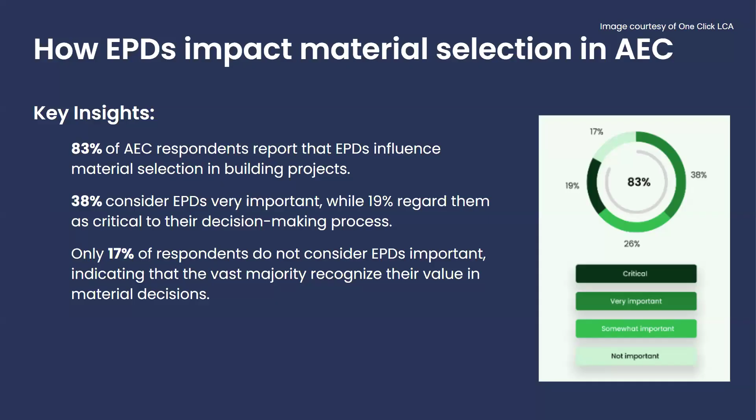And frankly, on the next slide, there's still not enough manufacturers doing this work. What I mean by that is doing the life cycle assessment work, not just to get an EPD, but to truly understand the life impacts or environmental impacts of the product, to ensure they're improving that portfolio. We've been on a journey as a company for 10 years now, leveraging and utilizing LCA as a tool for designing a better portfolio that you have at your fingertips to design your projects and ultimately create a better built environment. But what you see here is there's still a lack of manufacturers doing this work to the extent that they need to.

What I'll say about this is we saw about 10 years ago an initial movement towards EPDs, but they were also industry average. It was, how do we take the sum of all parts and put them into one comprehensive LCA that says, here's TPO, single ply membranes, here's what you can expect the environmental impact associated with that product to be across the whole sector. It's not good enough anymore. This commitment, this work by manufacturers - identify those manufacturers that take this work seriously, because honestly, those who are doing product specific EPDs have the products to back up a better built environment from an environmental performance, as well as from an overall building performance perspective.

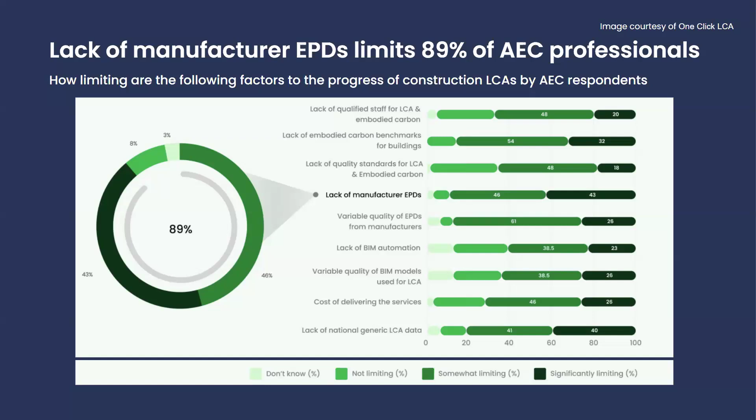And Jeff, if you want to switch into this study we've done, which is really compelling. I'll definitely do that, Jen. Thanks. I think the product specific EPD and disclosure requirement is increasingly becoming part of LEED v5, for example. So there's a push and a pull - a push by leaders and a pull by the sector - in continuing to improve the environmental performance of the built environment, as represented in LEED v5.

Moving forward, what I will say is we don't look at this just at the individual product level. One of the critical approaches we've seen to take is, because roofs aren't necessarily built just one product at a time - you guys know that as well, if not better than us - it's about building a system. How do we build a system?

So what we've done is we launched into a study about a year ago, and you can jump to the next slide if you like, Jennifer. At the time, we were working with Cove, who was doing a lot of analysis around building performance and looking at ASHRAE 2019 baselines and equivalent industry standard systems.

We looked at 6 different roof systems, 3 TPO and 3 PVC, referred to as good, better, best. We've always believed that at the core of our products, environmental performance is paramount, and that our basic portfolio products and systems need to have environmental performance second to none. That was at the heart of why we did this research, looking at how a good, better, best system—TPO and ISO, or PVC and ISO—compares to the industry average and other materials out there.

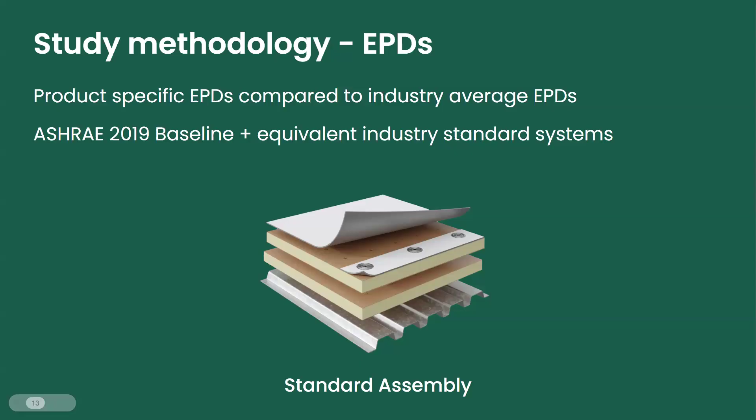So I'll share a little bit about how we did this. We looked at all the climate zones across the US, incorporating the International Energy Code, as well as doing a comparative evaluation of all the product-specific and industry average EPDs to determine how roof systems actually compare. We didn't do this work ourselves—Cove did it. We submitted all our data to them and they did the evaluation.

This gives you a picture of the climate zones we analyzed. We were looking at two things: equivalent energy performance, based on similar energy requirements for that specific zone, and embodied carbon performance. What we found is that our systems—this is our base system comparison—comparing our TPO, PVC, and polyiso insulation products to the industry average TPO, PVC, and ISO, show a significant reduction in embodied carbon.

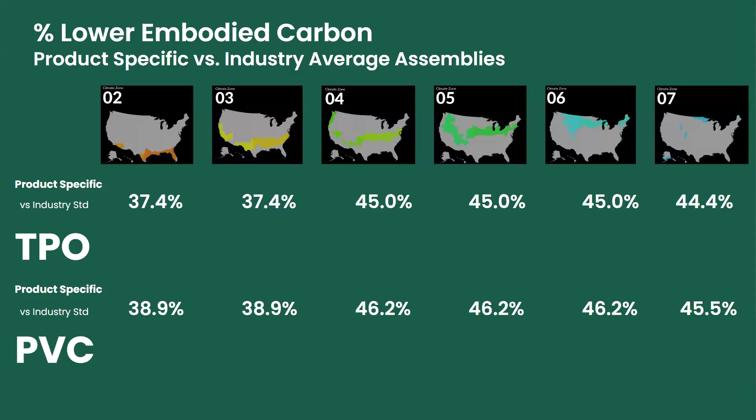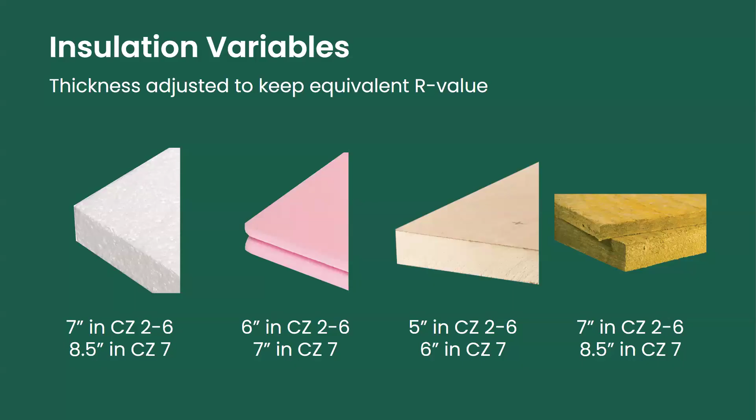So we didn't just stop there. We didn't just look at the comparative analysis of the same product to our industry average—we looked at competing materials in insulation. This gives you a snapshot of what was important here: not all thicknesses are created equal. The amount of material used, whether it's polyiso, EPS, XPS, or mineral wool, requires different thicknesses to meet the energy code specification for that climate zone. This is a snapshot of what we did there.

Again, this is our base system: a 60 mil single ply TPO mechanically attached to 2 layers of 2.5 inch polyiso insulation. We compared that again to the industry average, and then to EPS, XPS, and mineral wool. You see again an equivalent significant improvement, clicking through to the embodied carbon savings associated with that TPO polyiso system. Jen, could you click to the next slide and have those numbers pop up?

So on average, around 42% over industry average. Again, this is nationwide, not just one climate zone. This is an average, but a 16% reduction to EPS, 64% reduction of embodied carbon to XPS.

And a 77% embodied carbon reduction to mineral wool. So I'm really curious, Jeff, what roof insulation are you specifying, those of you listening in? Polyiso is about 70-75% of the insulation utilized on roofs, but there's areas where different choices are made, so I'm curious where this group lies in terms of product specification type for roof insulation. If you could put that in the chat, that'd be good to know.

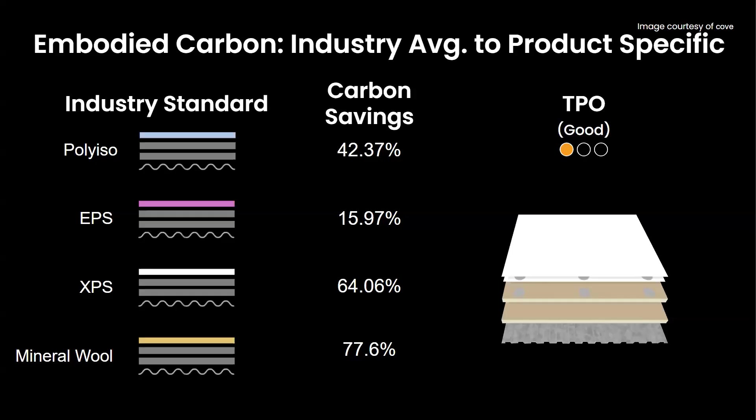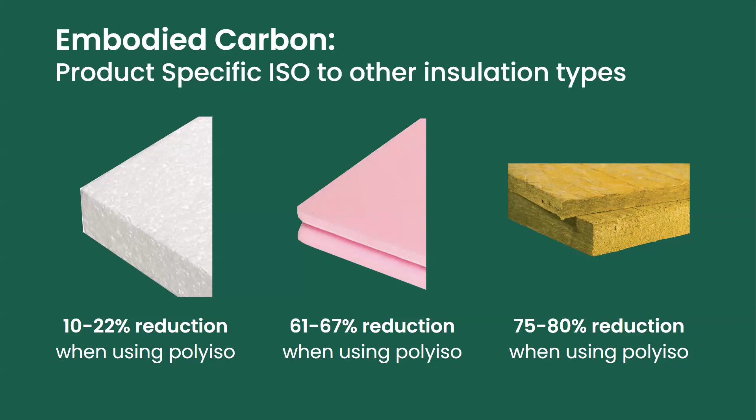And the one thing I'll add here, this is our base polyiso product. This is not even the non-halogenated polyiso product in this base assessment here. That would show even greater performance. Jump into the next one. So the product specific comparison dives in a little more deeply into those 3 other material comparisons as well.

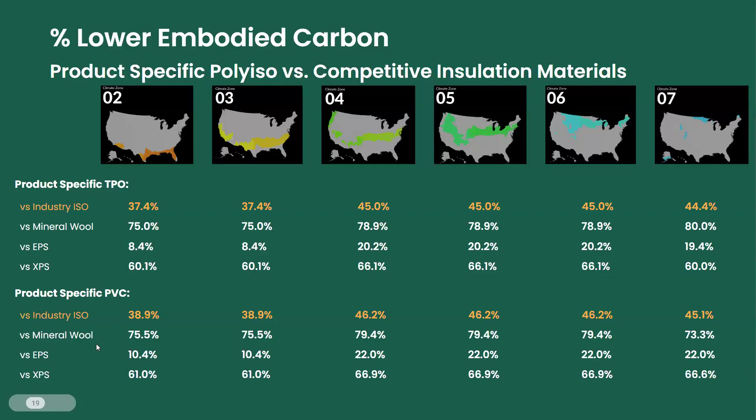And then lastly, digging in, we didn't just do this assessment on our standard assembly. We did it versus an upgraded assembly, which included a cover board here, which you see. And then we ultimately did a final comparison with our NH polyiso with a vapor barrier as well as cover board and thicker single ply membrane, all experiencing equivalent performance, if not even greater performance, as you can see here. That better system, the one I just shared that incorporated the cover board, we see a 50% reduction in or improvement in carbon, embodied carbon savings.

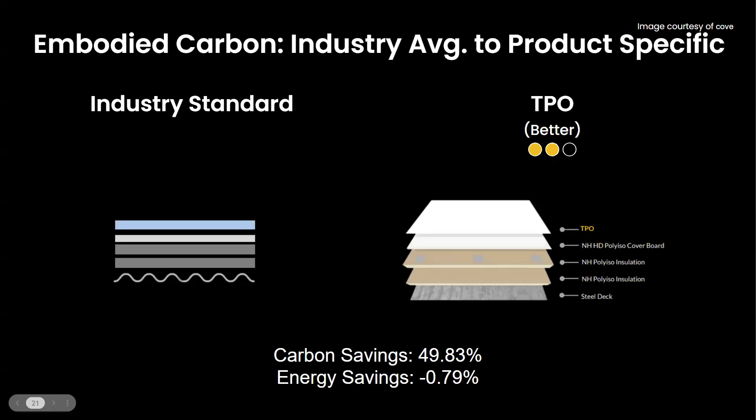So with that, there's a lot I just shared with you. There's a lot to dig in here. We're very excited about this data because it goes beyond just that product specific environmental performance, and it looks at the full roofing system performance.

And again, there's trade-offs, but this is the type of research and effort we want to do in partnership with the architectural design community to really help property owners and building owners set their goals and realize how the roof plays a role in an overall project's sustainability performance, whether it's the green building goals they've set for their projects, or green building certifications they're looking to achieve, or ultimately helping to make the case for why green, sustainable, and sustainably designed and built buildings actually perform better for them, as well as their tenants and customers.

We're here to help partner with you in making the case. We've got a lot of research. We've been doing this for years to really help the whole value chain of the built environment recognize and realize that you don't have to always make the trade-off against sustainability or sustainable design. It actually pays off for you.

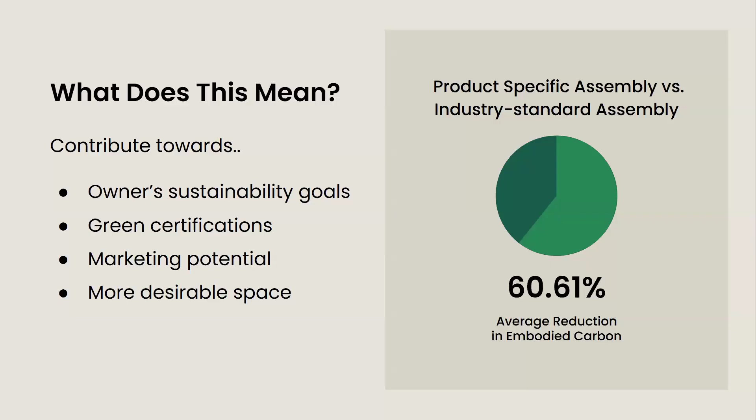So I want to focus on this Goodwill project, which is the Goodwill of the Great Plains. And this is Goodwill on multiple levels, right? It is a charitable organization. The purpose of their building is beautiful.

They were able to make sustainable choices in a budget-constricted project. So a little bit about this project: it's not your typical Goodwill where we're dropping off donations. This is actually a multi-use building.

It has an adult daycare in there, as well as some of their offices. Their requirements for this project were that it was accessible on both cognitive and physical capabilities, but it was also net zero.

Okay, so let's dig into that a little bit. We have a bunch of design choices here, and this was a project designed by CMBA architects. They wanted a robust design with a mindset towards the ease of installation. So this is the assembly they came up with.

We have a vapor retarder at the deck level. We've got two layers of polyiso insulation that are mechanically attached. We're adhering that HD polyiso cover board, and then we have a self-adhered TPO membrane.

As we talked through with the architects, what they were really looking to achieve was both the reflectivity in the TPO membrane, as well as the properties of the vapor retarder that's installed as an air barrier. This is really helping to reduce the strain of the building's HVAC systems, resulting in not only saving on energy and the cost of energy, but also equipment maintenance cost, because we're not overstressing this equipment.

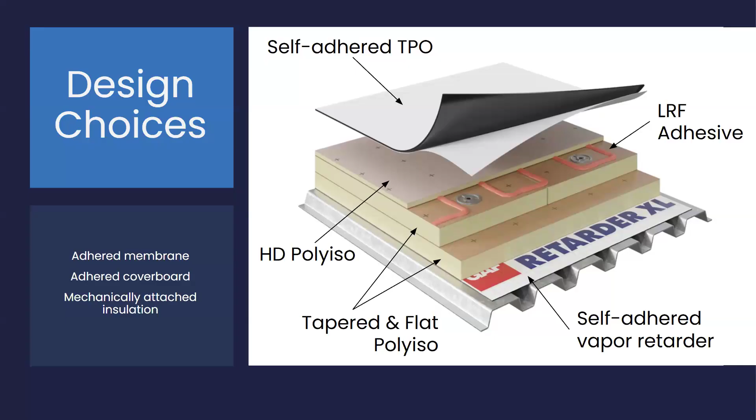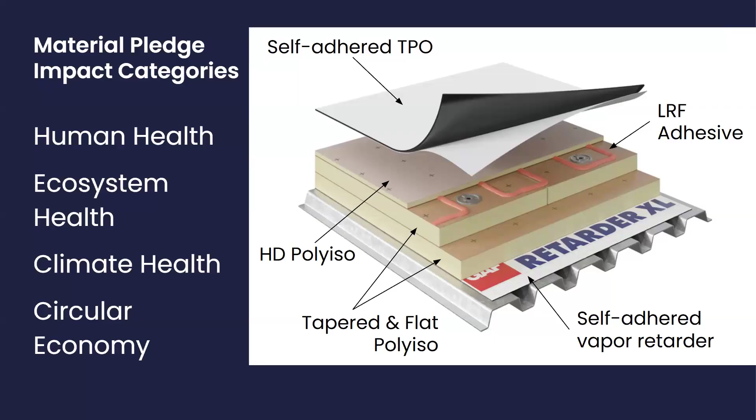So the next layer is the impact that these design decisions have on human and environmental health. We can really lean into that when we're making decisions with intention, like we did on this project. This was not a Living Building Challenge project, right? They didn't need to comply with all of these elements, but they chose to do the right thing. They chose to say, what can we do within our budget?

Now, this is not a crazy over-the-top assembly. It does have the vapor retarder, which is important for many other reasons as well. But all of these layered into having this great impact. We're thinking about recyclability, durability, minimizing chemicals of concern, and what are the trade-offs that we need to have in these conversations. So with this assembly, we look at all the environmental certifications that we can have in here.

We have third-party verified ingredients through our insulation and the roof membrane, and also third-party verified recycled content for that insulation and membrane. We have product-specific EPDs that are certified, not just produced by us, but certified for both the insulation and the membrane. And then the resiliency is really layered in there with that HD, non-halogenated polyiso cover board.

Can I add on there too? With the vapor retarder, we actually have a Green Guard Gold certification for low emissions with that vapor retarder. I think it's the only vapor retarder on the market that has that UL Green Guard Gold certification. So there's just another added element into this assembly as well.

To us, the next step in this iteration is using non-halogenated polyiso, both in the insulation and the cover board. Using that can have a significant impact on human and environmental health, as well as longer term performance. With a non-halogenated material, we're red list free, and there's no reduction in R value at low temperatures. This is available in both regular ISO and high density.

So in this scenario, this is how we could take it to the next level. And spoiler alert, there's no added cost to doing this. Jeff, you want to tell them why? I think this is the best story, and I know you were so instrumental in making this happen, so I don't want to steal your thunder.

No, there were a lot of people that were very instrumental in making this happen. But ultimately, at the core of building sustainability from the ground up, or from the roof down in your project, it takes everyone. So it was years of engagement with our suppliers to say, how can we change the material makeup of our polyiso insulation to ensure we take red list chemicals out of that. We are constantly analyzing what's coming in the global red lists and saying, how do we start designing ourselves for a future product or system that won't have any of these one day.

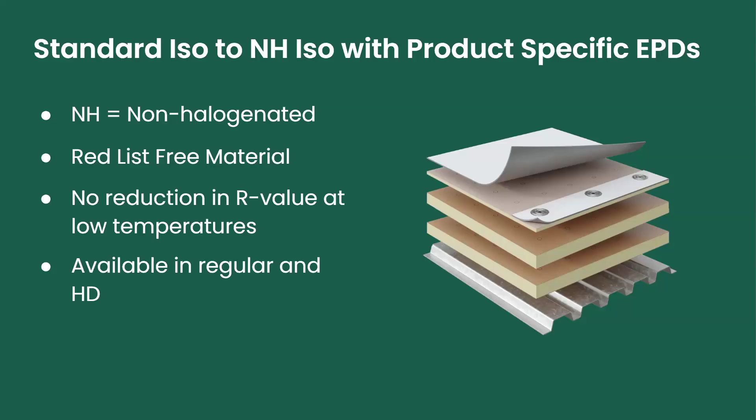So we've now removed that value engineering conversation where the contractor is going to say, we're going to take this out. That's gone. That argument is now gone. And this is a really great way you can hold this part of your design in the project because there are no additional cost implications.

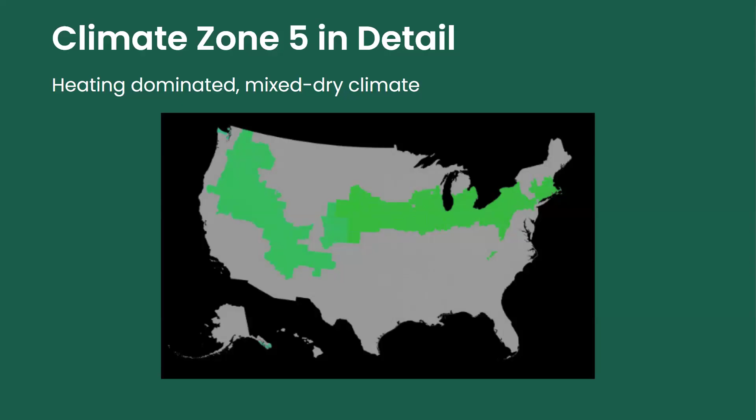So one other thing I wanted to mention about this Goodwill project: it's up in Iowa, so we're in climate zone 5. That's a moderate to colder climate, we've got full on seasons, cold winters and hot summers. So the insulation and moisture control are really key to managing energy costs and tenant comfort. This meant the project needed to be very focused on having a tightly sealed building enclosure with continuous insulation, which is why you saw that vapor retarder at the deck level—we needed that as part of the air control layer to make sure we were sealing that out and not allowing any moisture up into that assembly or into the building, to prevent condensation risk.

So let's see. This is some data we pulled together through the study that Jeff was sharing with you—this is embodied carbon reduction for a bunch of different building types: data centers, hospitals, warehouse, retail, because we're just looking at insulation here. So if I look at the embodied carbon of industry standard polyiso insulation, this is the volume of embodied carbon. What does that look like—so this dark blue is the polyiso, this medium blue color is the TPO membrane.

So this is just industry standard products. Now, if you were to specify specific products and using our product-specific EPDs, this is a pretty significant reduction.

And this reduction is what you're going to see in the polyiso. This is a 49% reduction. So we really see that the insulation has such a big part of this.

Now, from a performance standpoint, I'm always going to advocate to have a cover board, especially when we have rooftop solar. So here, if we add in the HD cover board on top, yes, it's adding R-value, but it's also adding to the greenhouse gas emissions. But that's still a 40% reduction.

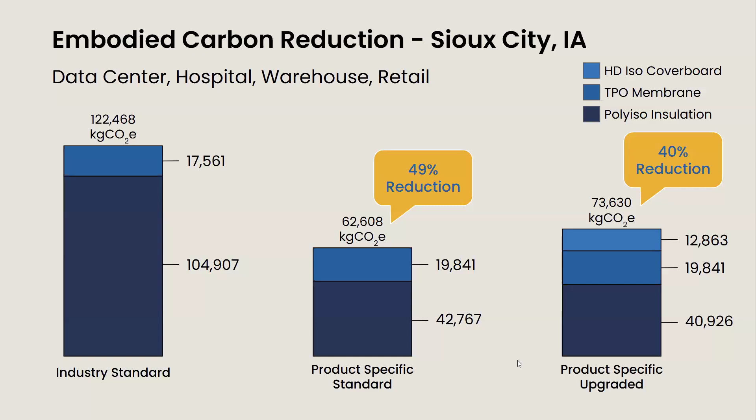This is a really considerable reduction that we can have just by being intentional on how we specify, and really encouraging the manufacturers you're working with to produce the data you need to make these kinds of resilient design decisions.

So material choices matter, right? This is where we had talked about the different kinds of insulation Jeff had thrown out there. So here's the mineral wool compared to EPS, XPS.

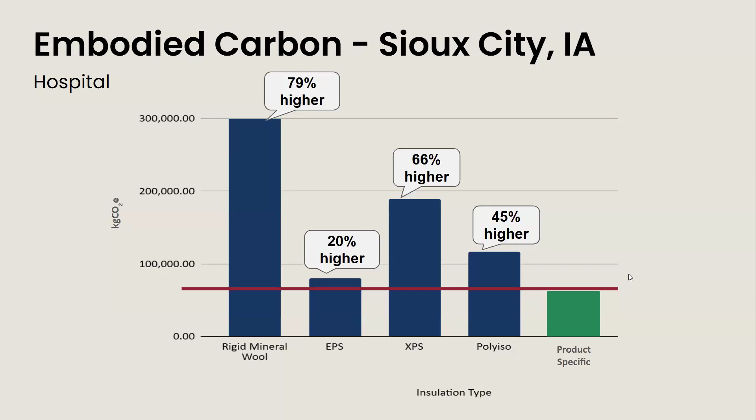This is the industry polyiso, but if you go with the product-specific, we're all the way down here. So this is kind of the increase in embodied carbon. I'm curious if, when you guys are specifying any of these other types of roof insulations, but this is really the sustainable solution. And we see how quickly that adds up.

All right, I have one more example I want to share with you. Was anyone at the AIA convention this year? And if you were, did you walk out of that convention center and see this brand new building? It was almost done, wasn't quite done. There were a few windows missing as they were finishing up construction.

But this project is something really special. It's a commercial building up in Boston, and has some really cool goals, right? So it is a very community-oriented project. It's office, it's lab, it's retail, it's community gathering, all rolled into one.

But it had some very significant sustainability goals. It was focused on SITES and LEED and WELL and the Boston stretch code all at the same time. So this is probably the most sustainable building in Boston in this moment.

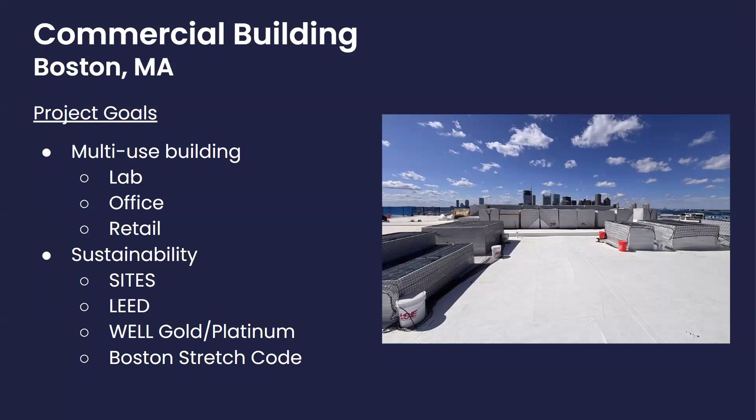So they had to make some design decisions. And my question to you is, does this look like a particularly amazing roof that you would put on a Living Building Challenge project? Does this look like this incredibly sustainable roof? It looks like a conventional roof to me.

So there are a couple things to note about this, right? We've got a concrete roof deck, so inherently we need that vapor retarder to manage the moisture. That's like a performance mandate, right?

We're able to use the two layers of insulation between the flat and the tapered. The tapered was really interesting in that we had to really measure down to the fraction of an inch because of the FAA height limitations for the building. So that became an interesting exercise.

The membrane is part of a stormwater management system, so that had to be accounted for in the project. And it was also supporting a solar array. So we had to think about all of these performance attributes that needed to come into play.

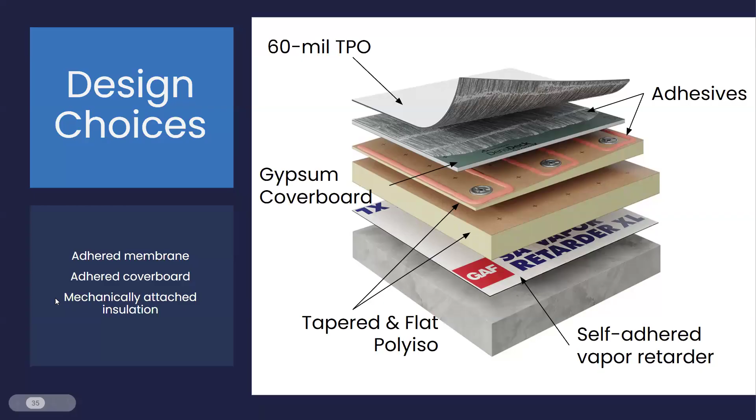And oh, by the way, we have all these sustainable attributes to hit as well. So how do we do that? How are we going to look at all of these parts and pieces and design an assembly that's going to meet all of these performance needs and all of these sustainable goals for this project?

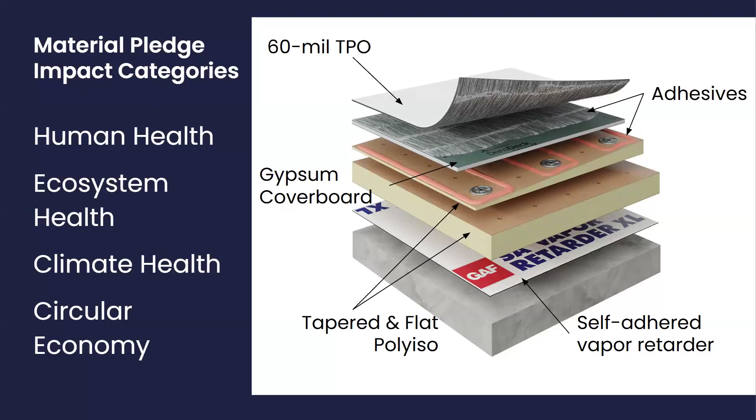So this is how we really can leverage the material pledge impact categories to walk through all of these choices that we have. So again, we've got our third-party verified ingredients, recycling content, we've got our product-specific EPDs, we've got our resiliency with the cover board that's in there.

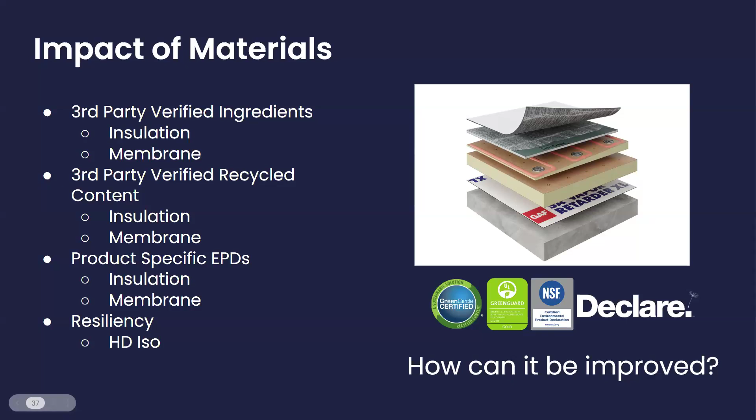How would you improve this assembly? What's missing? So again, that HD Iso goes a long way, and that again at no cost there. So those are elements we can capitalize on.

But I love that this project focused on utilizing TPO as the roof membrane. And there's a lot of really great attributes with TPO in general. TPO is red list free, right? So we don't have to worry about those elements that we do with other roof membranes and the trade-offs that we need to make there.

But the premium grade TPO, not the standard grade, but the premium grade TPO also complies with NSF P151 for potable rainwater catchment. So that was really leveraged. It's also a higher performance grade.

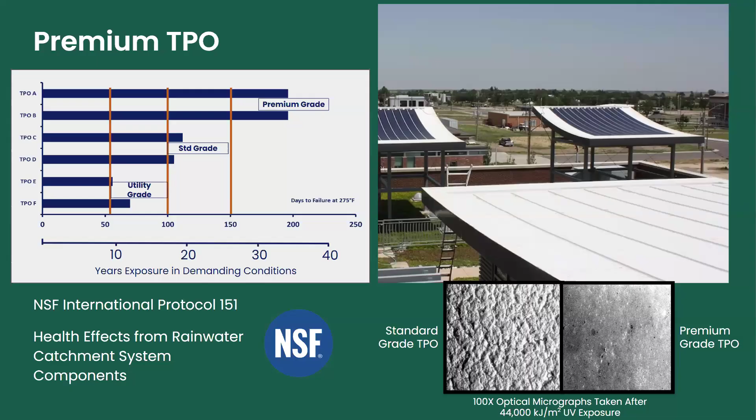As you're looking at roofs that have that solar capacity that are really going to be baking in UV to a greater extent, the long-term performance of these premium grade TPO materials is really the right way to go. So we got a 2-for-1 here.

We got the performance and the sustainability attributes all embedded into one material, but we can't do that without the product-specific EPDs either. So that's kind of how this all ties together for us. The other area where you can always find improvements is we've used TPO and reflective coatings at times for bifacial solar projects to get, for a fraction of a cost more for the bifacial panels on a rooftop, nearly double the energy performance of that solar system. The reflectivity that enhanced TPO provides adds potential future benefits to that as well. If that made sense for Boston, maybe, certainly in other parts of the country it certainly has.

Great, thank you. All right, well, I wanted to make sure we left enough time for questions and conversations. So I just want to summarize. The whole point of this has been: what if your roof could be a bigger contributor to your sustainability goals at the same time while not breaking the bank? So let's make sure we're leveraging the resources available to help project owners stop thinking that sustainability is expensive and start thinking that sustainability is smart.

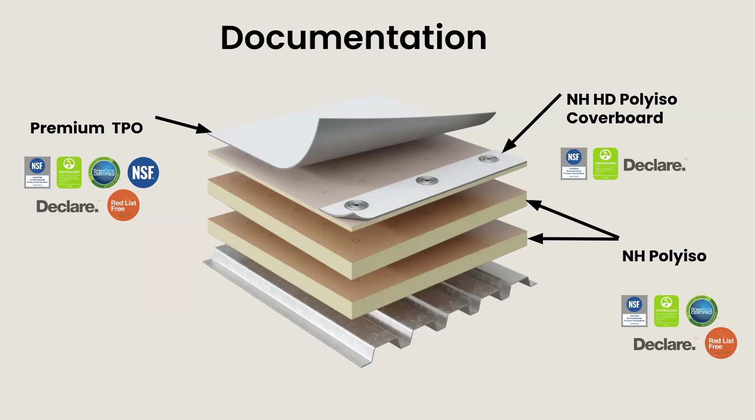I saw in the chat somebody saying, well, yeah, sometimes we can't get the EPDs and it makes it really difficult to verify the reliability of the LCA analysis. Okay, well then push on your manufacturer to help you with that, right? Ask them to disclose what isn't. I know we've fielded some calls on the nuances of things that they're looking for clarity on, and we're willing to sit down and partner with you and have those conversations and really help drive projects to make these sustainable choices.

And awareness that in many cases, you guys are already doing the right things. So knowing what to look for and what to ask for — not just EPDs, but product-specific EPDs, and product-specific EPDs that are certified by NSF, right? Really taking it all the way through that scenario. Looking for HPDs, but the most current version, which I believe is 2.3. Is that correct, Jeff? So we want to make sure we're looking at that.

Looking at the product life cycle. Is it cradle to gate? Is it cradle to grave? Is it cradle to cradle? And really looking at what elements are embedded in those assumptions that make up the LCA. The green circle certified content, whether that's the recycled content, right? That's third party — that's not just a manufacturer saying, oh yeah, we do that. This is verified information. And then of course the red list free materials, the declare label, and then looking for those products that have that lower embodied carbon.

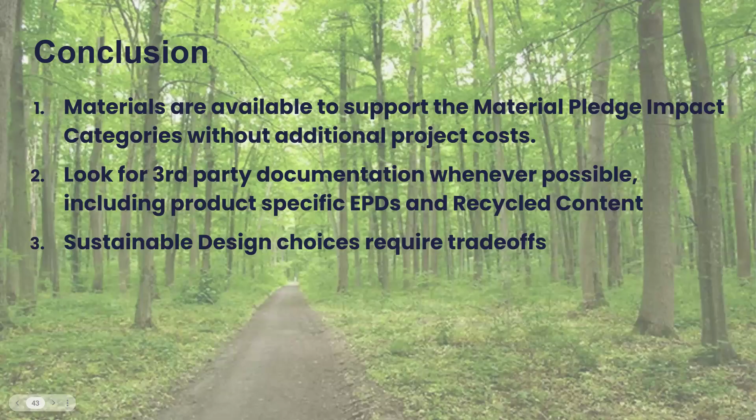So to wrap it up, we know that there are materials available to support the material pledge impact categories without additional project cost, and that, I think, is the big key to holding your beautifully designed projects and specifications. Looking for that third-party documentation whenever it's possible, including product-specific EPDs and recycled content. And sustainable design choices require trade-offs, and we're always here to help you navigate those conversations, to help get that owner to stop thinking that sustainability is expensive and start thinking that sustainability is smart.

So we have time for a few questions, but I'd actually like to start with the first one. So if you guys want to put your questions in the chat — I don't know if it's even an option to take people off mute — but Jeff, I wanted to ask you a question. I wasn't able to dive too deep into the chat, but I did see a little bit when we were asking about EPDs and their availability. We had such a wide range of answers, which I thought was really interesting. We had EPDs are available and often salient, to they're not really available to vet out the reliability of the LCAs, to we're not really looking for EPDs.

So there's obviously a pretty wide spectrum going on, right? But how can our listeners find this type of information?

Yeah, it's a great question, Jen. And I would argue that everybody on this call, an EPD is an added tool for you to understand the environmental impact of the products you're looking to spec into a job. Make sure that an LCA is conducted on what's called a product category rule, defined by a body of experts on how the assessment for a product needs to be considered.